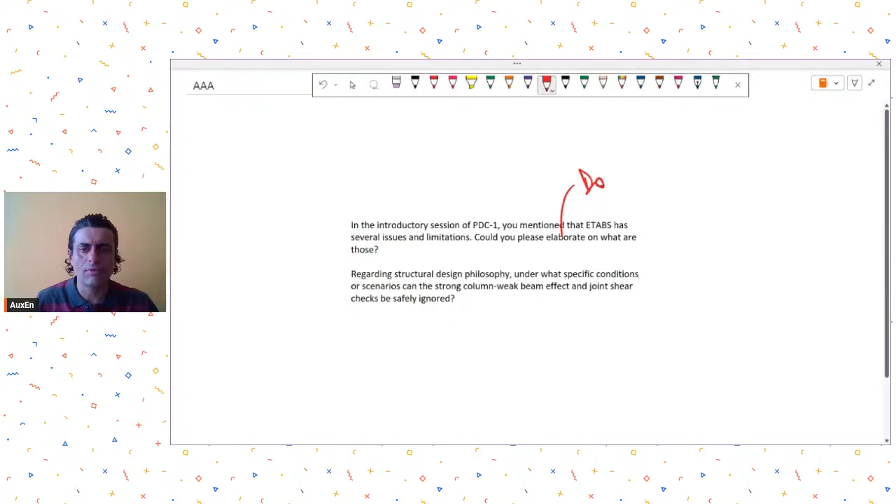The first question for this week has been asked by engineer Sheikh Ahmed Jawad. He is from Bengaluru, and he is saying, in one of the courses you mentioned that ETABS has several issues and limitations. Could you please elaborate what are those? So I was talking about ETABS 18 over there, and in ETABS 18 there were issues related to some miscalculations for doubly reinforced sections. So this was one of the problems.

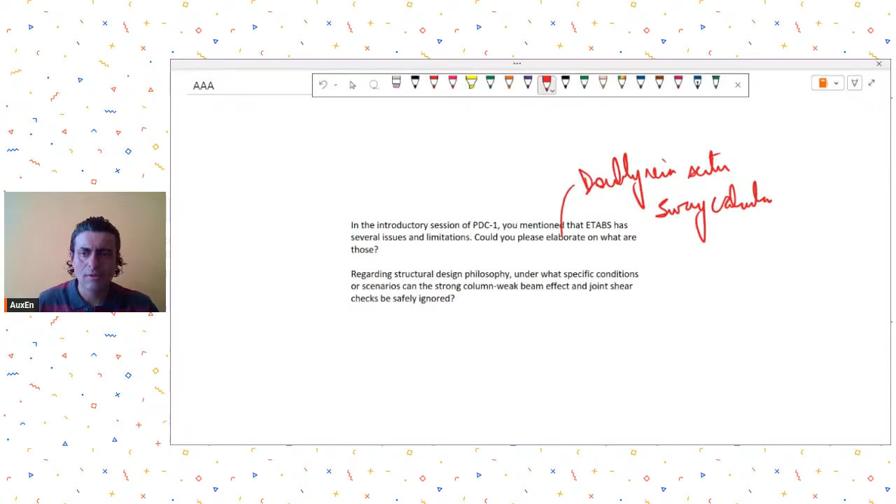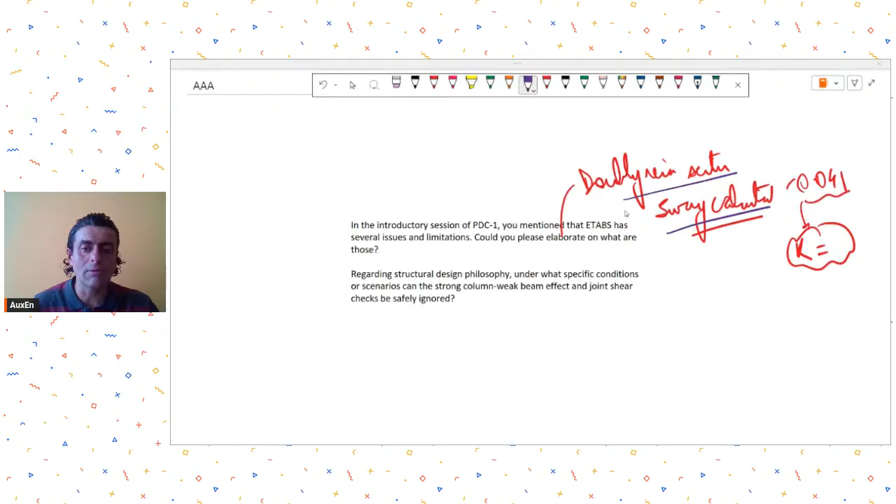Then there was a problem related to sway calculations. Sometimes ETABS would calculate the sway factor slightly on a higher side, and because it calculated the sway factor more than 0.04, it would take very high k values. So this was a problem that was acknowledged by ETABS documentation also, and they told the user to be cautious while column design, and check what is the stability index Q that has been calculated, and accordingly what sway factor is being considered.

Another problem was some issues with auto meshing. Auto meshing in older versions of ETABS was not very well done, and it would not lead to proper load transfer sometimes. Now those issues have been rectified in the newer versions of ETABS. Related to sway calculation, still you need to be careful. Doubly reinforced sections, nowadays I don't see problems in the calculation occurring. Okay, so these were the observations that I had.

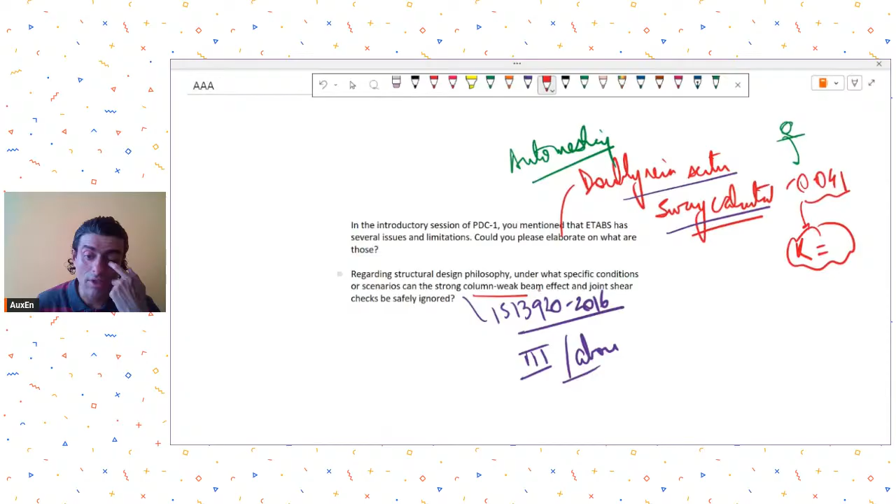His second query is regarding structural design philosophy. Under what specific conditions can the strong column weak beam effect and joint shear checks be safely ignored? So you follow IS 13920, and this code has to be applied if you are in seismic zone 3 and above. If you are in seismic zone 3 and above, you have to check for strong column weak beam and joint shear. Only at the roof level you are allowed to ignore the strong column weak beam. That too, I think some story limitation is there. Otherwise you are not supposed to ignore. If you choose to ignore, that is your purview, but technically if you are following the code, you are not allowed to ignore it.

Okay, all right. Next question is from engineer Abraham. He is from Kerala. He is a working professional. He is asking... I hope my voice is audible.

He has a query regarding the effective length factor for portal frames in a steel shed column. The shed has longitudinal bracings provided along the minor axis direction to arrest the side sway and transfer the longitudinal loads. For major axis buckling, I have considered the column base as pinned and top as fixed with side sway permitted, and therefore adopted KZ as 2. However, I am uncertain about the appropriate value of KY for minor axis buckling. As per the code tables, KY 1 is applicable for member with... Could you please advise whether KY equal to 1 can be adopted for the minor axis due to presence of bracing system, or whether a higher value should be considered to account for side sway effects?

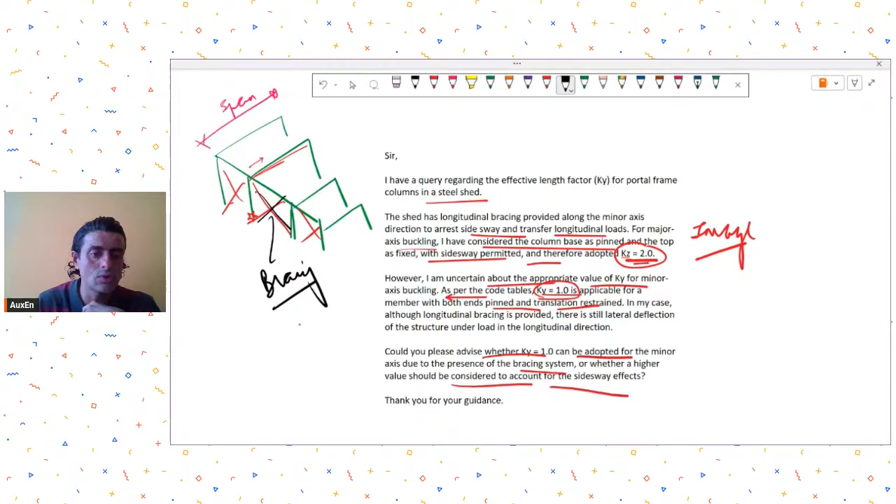So simple answer, you may take ky as 1, you may take the length factor as 1, provided that these bracings do provide effective restraint to side sway. You need to check that, okay? And for checking that, you could just see what is the axial load that will be transferred through in this direction, and whether these bracings in tension are capable of taking around 2.5% of that load.

So if that is the case, then you can consider it to be providing effective side sway restraint, and then I think you can take a ky of 1, okay. So this will be my answer to your query. The next question, and it would have been easier if you had provided some images.

Next question has been asked by engineer Yash Bhope. He is from Bhusawal and he is a working professional. He is asking, I am designing a rigid connection between a column and a beam in Idea Statica. During the connection check, the weld is failing due to excessive stress. As per this clause, to satisfy the weld stress requirement, I increase the weld size from 6 mm to 14 mm and the connection passes.

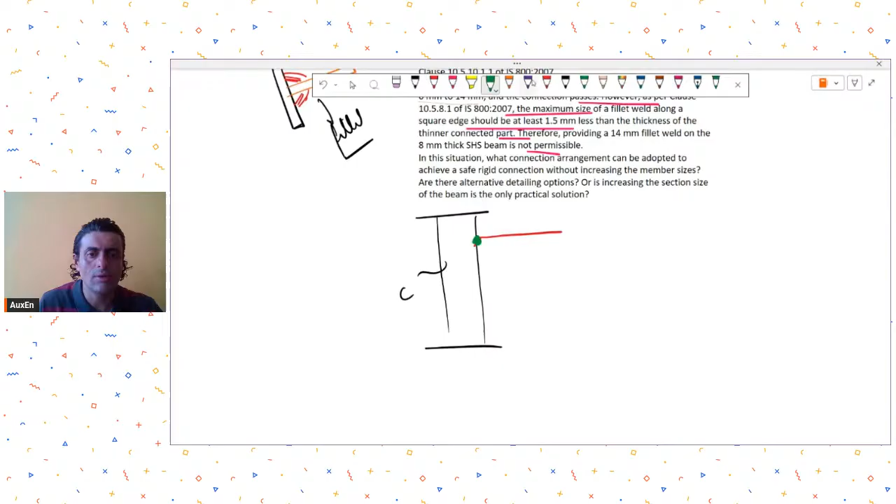The second thing is that if you want to connect two SHS, then it is better that you connect it with CJP welds. That means you will have a complete joint penetration weld. For example, I'm drawing the cross sectional view. This is your column and this is your beam. In your box they will make a groove over here and fill it up with weld. This is called a complete joint penetration weld. So when you have to connect two box sections, instead of fillet welding, you go for a CJP weld. The details of CJP weld you can get in the AISC codes.

And when you provide CJP welds, its strength can be taken to be equivalent to your material strength. So if you provide the weld grade up to, I think they have given, 10 ksi less than the parent material, you are allowed to take the CJP weld strength as good as the material strength. So that's what I had to say. Go for CJP welding over here.

In addition, adopting rigid connections may not be very simple for two box sections like this. So making a rigid connection out of this is not a practical thing. You will observe if you run the stiffness analysis in ETABS. If you run a stiffness analysis in Idea Statica, you will see that you are not getting a rigid connection out of these two SHS.

So you may refer to AISC 358. That will give you some guidelines on how to create a rigid connection between two hollow sections. Okay, so you refer to that. Because SHS to SHS rigid connection is difficult, one of the suggested detailing options could be, this is the elevational view, this is your column.

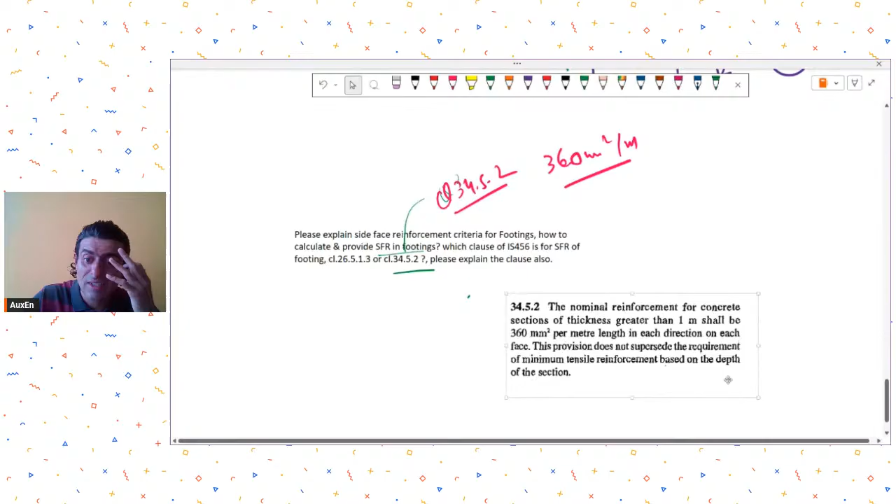Nominal reinforcement for concrete sections of thickness greater than 1 meter shall be 360 mm square per meter length in each direction on each face. So very simple. On each face, in each direction, that is side faces and top. Bottom anyway, you will be providing your tension reinforcement. So this has to be provided. Your 26.5.1.3 is for beam side face. So that is a different clause. Why are you getting confused? You are saying which clause of IS 456 is for side face reinforcement? It is clearly 34.5.2. 26.5.1.3 is for beams. There is no scope for confusion.

The next question is from engineer Rohit Dogra. He is from Kangra, Himachal Pradesh, and he is asking how to consider temperature loading in ETABS. You have to be more specific with your query. What exactly is your query regarding temperature loading? If you want the step-by-step method to apply temperature loads, it is better that you watch some YouTube videos or read the documentation in ETABS. So if you have any specific query, please ask. Otherwise, I will suggest you to watch YouTube videos on ETABS, or go through the documentation.

The next question is from engineer Sanjay Kumar. He is a working professional from India, and he is saying, while designing the base plate, which load combination should be considered? Should I use the maximum force and maximum moment obtained from all load combinations independently? No, you should not do that. Or should I consider the individual load combinations that give the maximum value of each? Yes, you should do this. This is what you need to do.

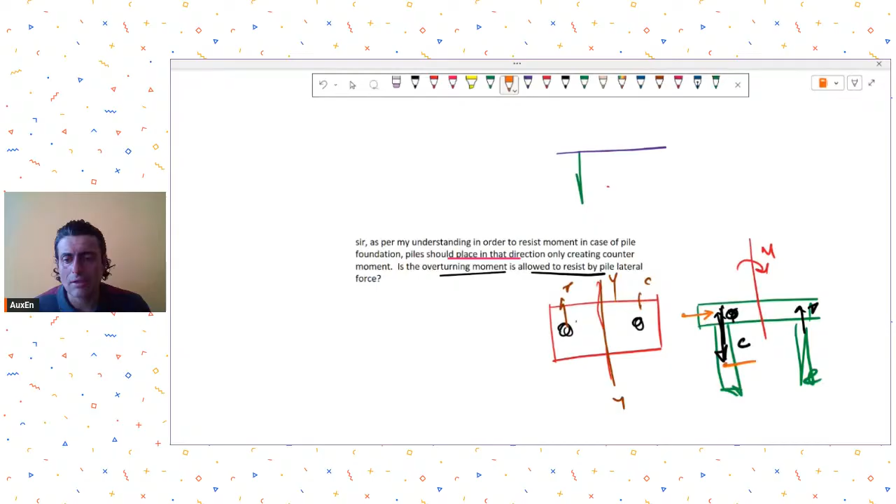By generation of tension compression couples, you will assume that external moments are being resisted, and whatever is the lateral load, that lateral load will be, let's say, resisted by the pile lateral capacity, and that in turn may create some bending in the pile, for which you need to check and design the pile accordingly. Okay.

The next question is from engineer Abdul Khaliku. He is from Riyadh, Saudi Arabia, and he is asking, what should I do if my anchors are failing in IDEA StatiCa? You need to see for which action they are failing. Most likely, although you have not provided me any additional info, I am assuming that they are failing for breakout strength.

If they are failing in breakout, there is not much you can do except providing supplemental reinforcement. Providing supplemental or secondary reinforcement is a way to avoid concrete breakout, and through that the checks for concrete breakout can be ignored. The process to provide supplemental reinforcement is given in chapter 17 of ACI 318-25. So you may refer to chapter 17 for how to provide that supplemental reinforcement.

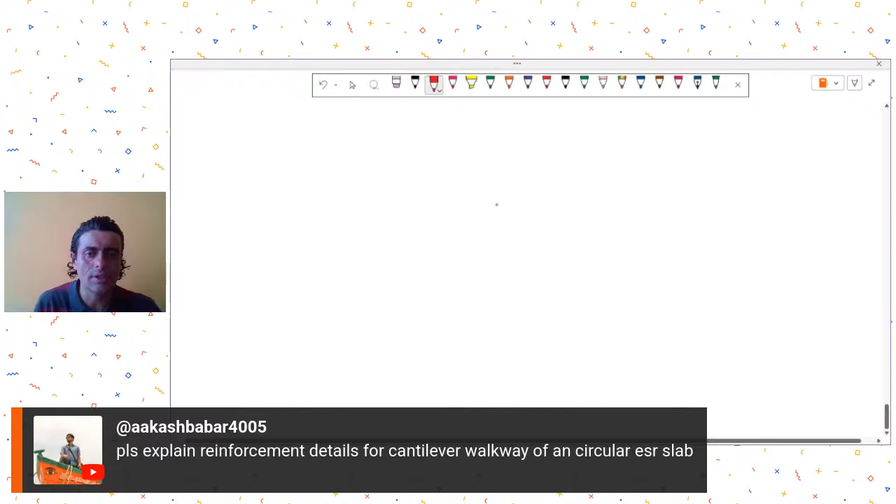Mr. Akash Babar is asking, please explain reinforcement details for cantilever walkway of a circular ESR slab. What do you mean by explain the details? What is your doubt in that? If you have a walkway, let's say this is your wall of the tank, this is your cantilever walkway. Provide reinforcement as you do in your cantilevers. What explanation you need is not clear to me.

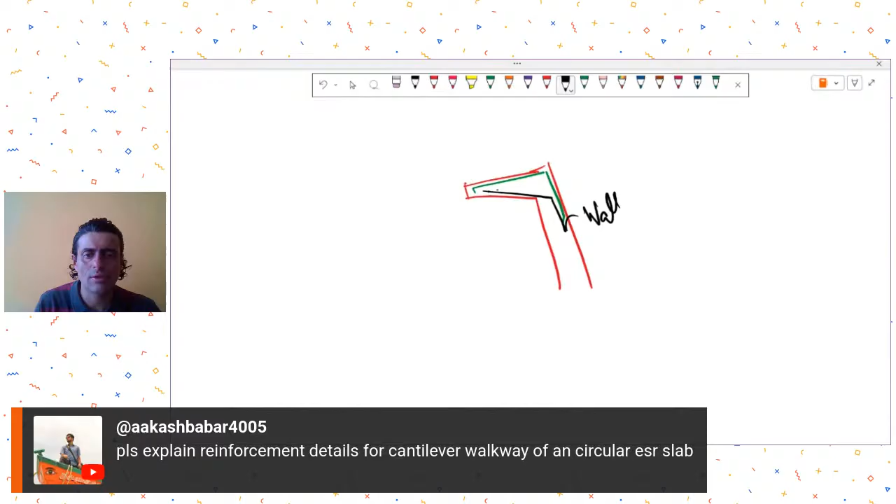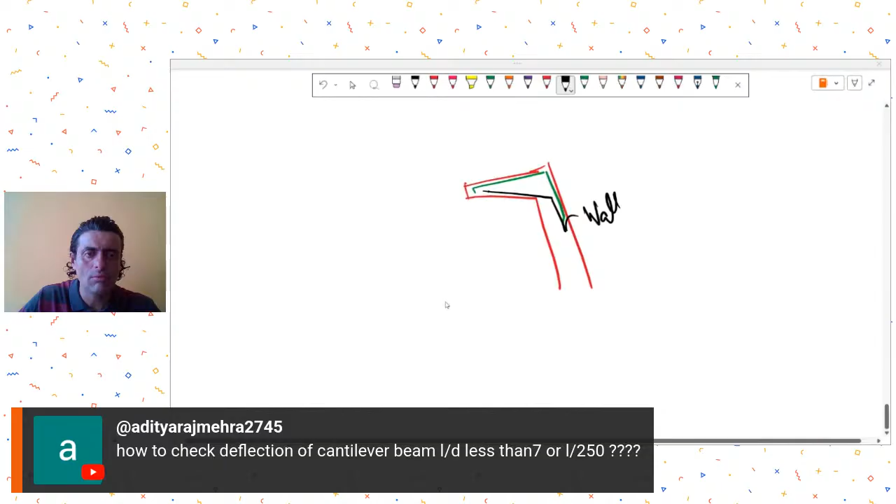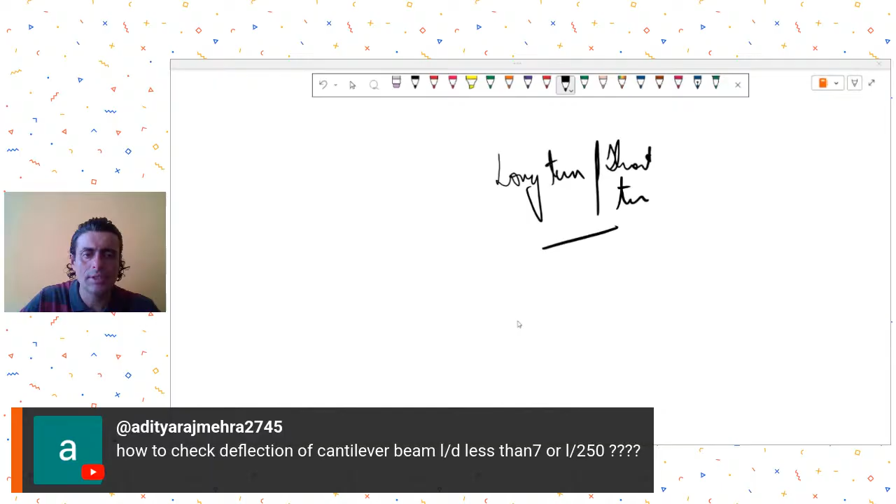The next question is from engineer Aditya Raj Mehra. How to check deflection of cantilever beam with L by D less than 7? You will have to model that cantilever in your software and do the long term as well as short term checks both. You will have to ensure through your software calculation that your deflections are within the limits if you are not following the minimum L by D ratios.

Azmi Adil Khan is asking about long-term deflection by cracking the beam in ETABS. It gives higher deflection as compared with manual calculation, while without cracking it matches with manual calculations. Now, what do you mean by cracking? Are you providing modifiers over there? What do you mean by cracking the beam in ETABS? Are you doing the crack analysis in ETABS?

If you are doing the crack analysis in ETABS, you are not supposed to provide any modifiers. Okay. And what are the manual calculations you are doing? Those things are not clear to me. So you need to provide me more information before I am able to answer this question.

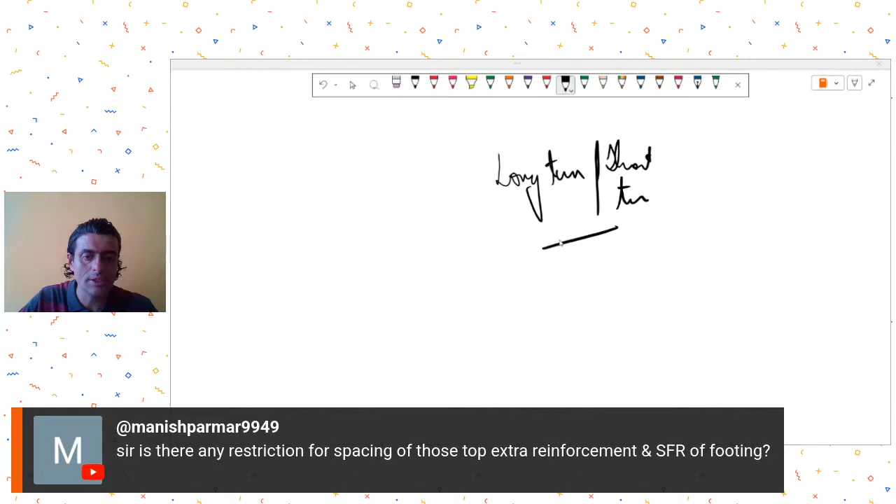Is there any restriction for spacing of that extra reinforcement? Mr. Manish is asking related to his earlier question. The restriction for spacing will be the same that you follow for your other reinforcements. It is better that you provide lesser spacings because that will also help you with crack control. So for the spacing criteria, you can refer to what you do for other reinforcement. My suggestion would be to go for as low spacing as possible. Around 100 mm, 150 mm is a good spacing to keep.

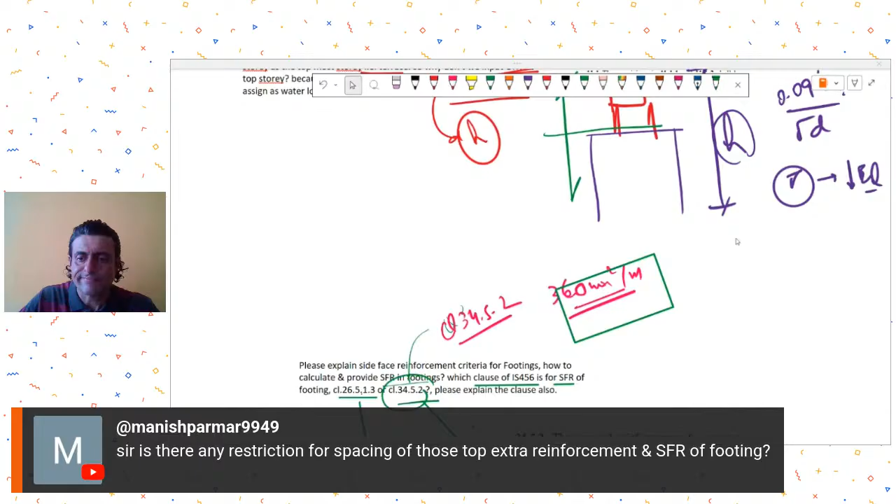Okay, Mr. Azmi is adding without modifier. So he's saying, where was his question? For long term deflection by cracking the beam in ETABS, it gives higher deflection as compared with manual calculation, while without cracking... So see, if you are not cracking, means if you are just doing the short term elastic, it will obviously match with your manual calculation, because in your manual calculation you are considering the I gross.

Okay, and you are doing the calculations, while if you are checking for cracks, you need to calculate the ICR, and then you need to calculate the I effective and all those things. So we have personally seen that the values match. Okay, in either cases they match with the software. So I'm not sure why your values are not matching. What I have observed is that you get good acceptable value matching, and we have done those in exercises for simple beams, portals and cross checked with our manual calculations also. So my experience is that they match.

So I hope if you are doing the manual checks for crack sections, you are taking the ICR, then accordingly you are calculating the I effective and doing all those calculations. My experience is that the values match. Okay. All right.

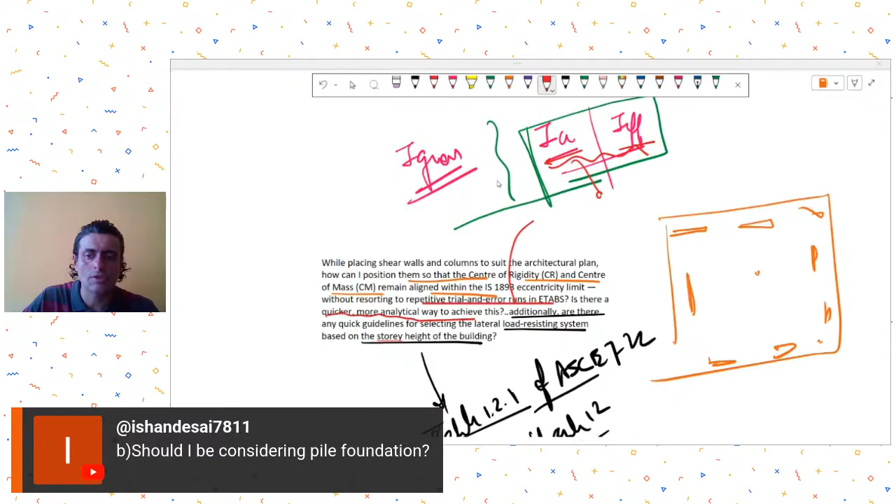Yeah, this may help. Providing strap footings along the walls, this may help. And then yes, you need to apply the surcharge load on the inner side of the wall, or providing the pile foundations can also help, provided that your pile foundations are possible over there. You can either provide this by providing strap footings with isolated or strap foundations at the bottom, or by taking pile foundations. Both can be done. Yeah. So whatever is possible, I mean, if piling is possible, you could go for piling also.

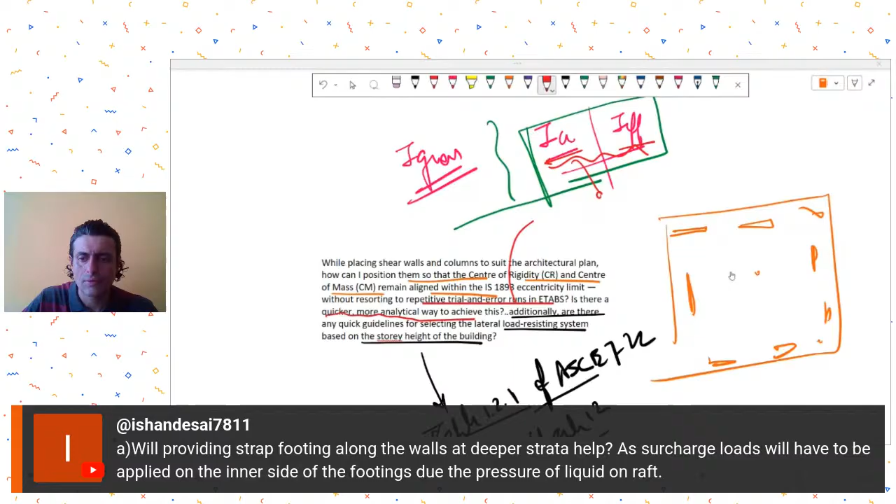Then, for on-ground tanks, why do we need to make a separate model to check the global effects of base shear and overturning moments? For sliding, we will have to check it manually, and for overturning, can't the same model be used? I'm not sure with this question. What do you want to say? For on-ground ETPs, do I need to check the effects of sliding and overturning? If I should, then what cases should I be considering for applying loads?

No, generally sliding and overturning for ground ETPs won't be necessary to be checked, because what will it slide for, isn't it? I mean, how will there be a sliding? In fact, for underground tanks also, why will there be any sliding or overturning that will take place? Because there is soil from all sides. So I don't see any reason why you need to check for sliding and overturning.

For calculation of impulsive time period in multi-compartment ETPs, would it be right to check the deflections by applying pressure Q on all the walls facing in one direction? Yes, it will be. I think it is appropriate to apply the Q pressure on all the walls in one direction simultaneously.

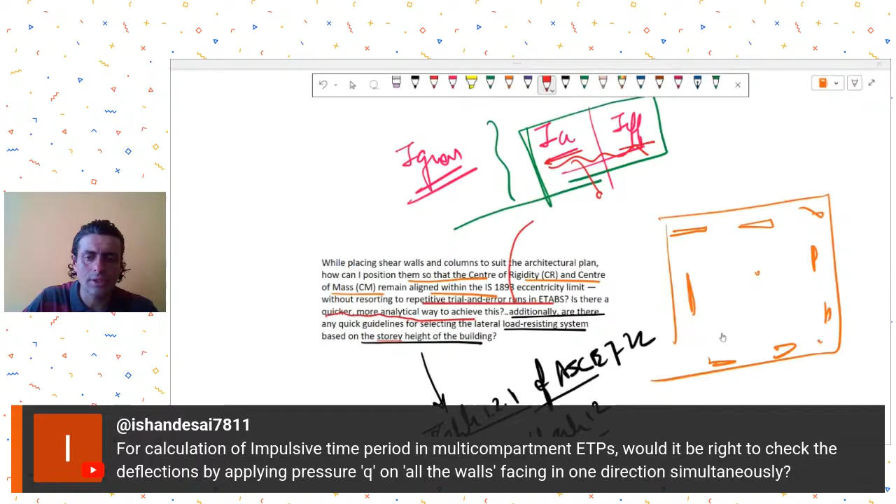See, it will depend on your tank configuration, okay, and it will also depend on your situation, that some compartments usually will not be filled simultaneously, some will be filled simultaneously. So it will depend on the configuration that you have in your system, okay. As per that, you need to apply your water impulsive pressures or the EQ pressure.

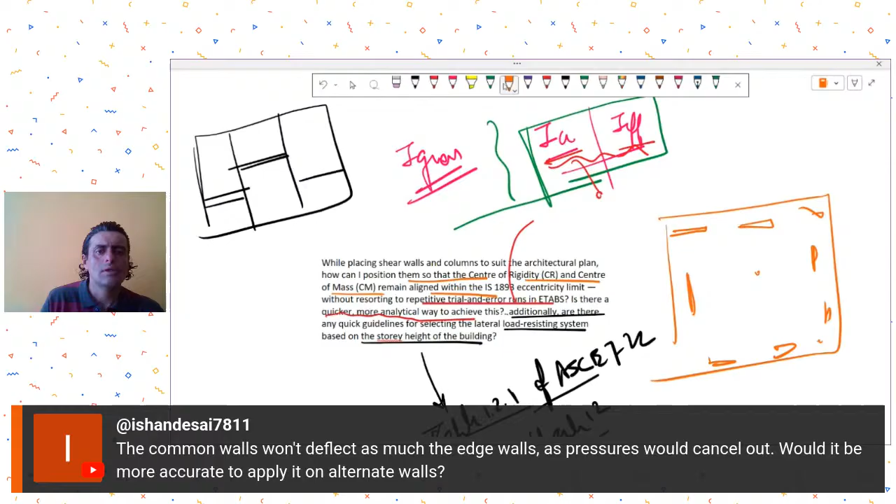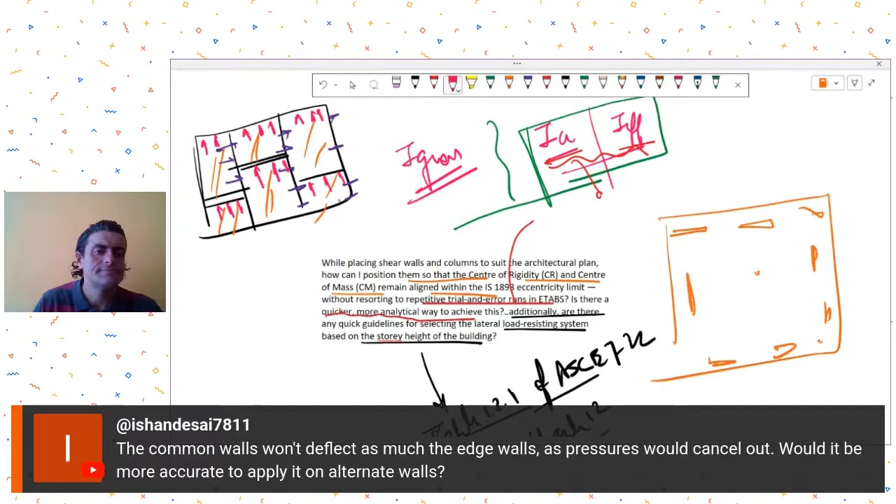So if this was your tank and these are the multiple compartments, this is the plan view. So if all these tanks are going to be filled, then you may apply the pressures on, let's say, this wall, this wall, this wall. In these directions you can apply, and when the earthquake is in the other perpendicular direction, then maybe on this wall, on this wall. So it will depend on your configuration, okay, like this. Then what are the other questions?

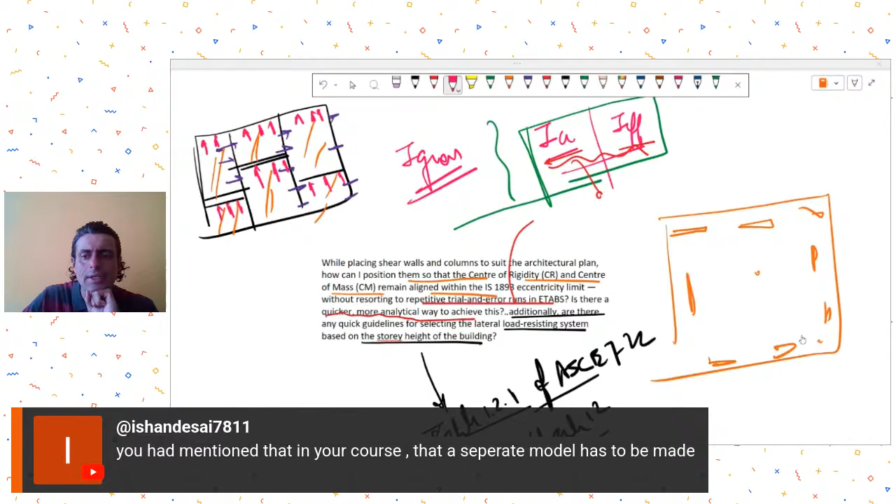Okay, I had mentioned that in my course that a separate model has to be made. Okay, I also don't remember what exactly was being discussed. So maybe I also need to go and see what exactly was the thing that was being discussed over there. Honestly, I don't remember right now. So you may just go back to those sessions and see what exactly was being discussed over there. Okay. All right.

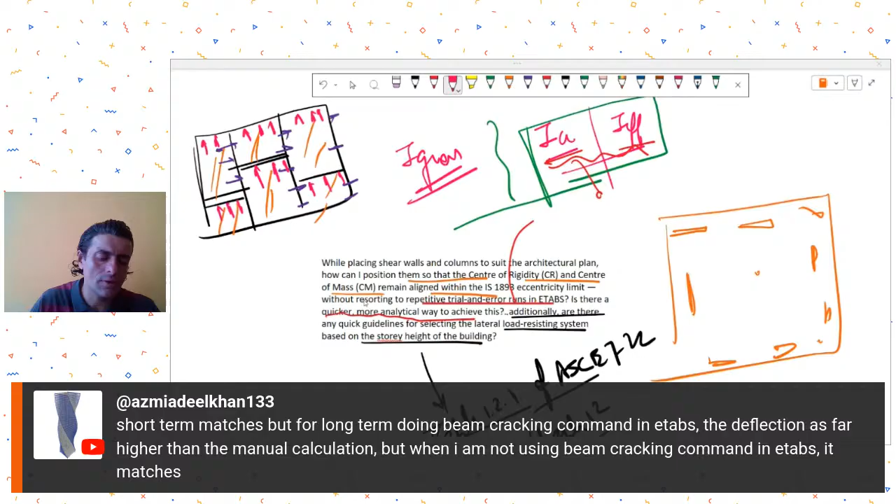Mr. Azmi is saying short-term matches, but for long-term deflection, with the cracking command in ETABS, the deflection is far higher than the manual calculation. But when I'm not using beam cracking command... See, if you are not using beam cracking command, you are basically doing your short-term elastic calculation, isn't it? That will match. Also, you need to see. Okay, I got it. You check that for long term, how you are checking.

There is this discussion that is ongoing, especially with respect to ACI codes, that the creep shrinkage deflection has to be taken as additional to your long term deflection due to sustained load effects, or you just need to take the creep shrinkage part separately. So that is one thing that is slightly confusing in the code. The code says that it is an additional thing that has to be added to your sustained load effects, okay.

Also, you just see what sort of reinforcement you have defined, because reinforcements will also impact your long term calculations. So you see those two things: first of all, how you have defined the long term deflection, whether you are adding the creep shrinkage deflection on to the sustained load effect deflection, or you are just taking the creep shrinkage part, and also see how you have defined the reinforcement, which reinforcement it is taking.

Also check whether you have meshed your beam and slab properly, okay, and whether you have included the beams and slabs in your cracking. So do check all those things, and then we may be able to discuss. Okay.

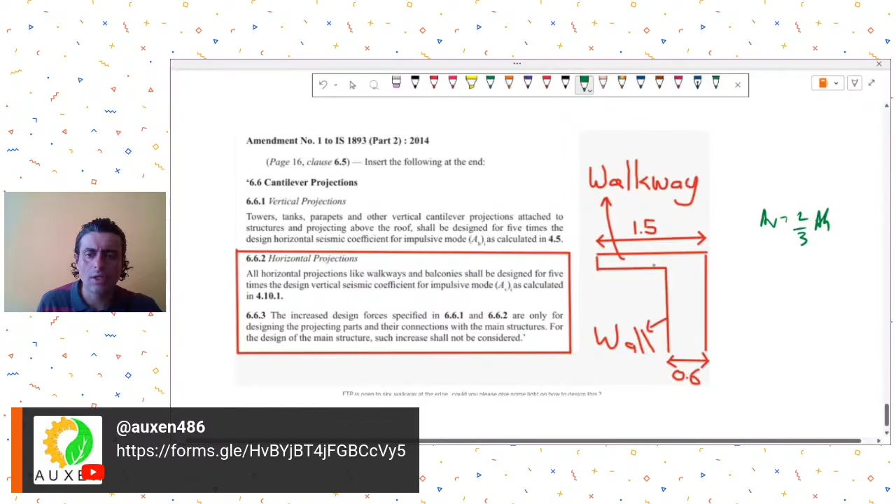Accordingly, you consider this. This thing you can do manually. I don't think you need to do anything on the software over here. So you just calculate this two-thirds of AH. Okay. And usually it will be less. In your case, if your seismic zone is not very high, it will come out to be less than the self-weight of the system itself. So I don't see any problem over here that you may face.

Once you consider the AV in opposition to your self-weight, and for one case you consider it to be acting in the direction of self-weight, accordingly you calculate the bending moments, etc., and design it. Okay. So yes, so this was his question.